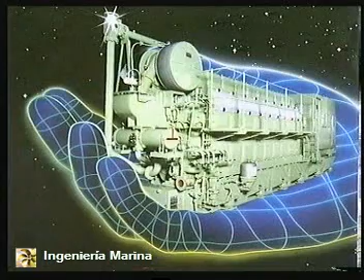This video shows how to overhaul the cylinder head, piston and cylinder liner. With regard to the dismounting and mounting of the components, please refer to the relevant instruction book or to the cylinder head, piston and cylinder liner exchange video.

This film shows how to use the tools which are available for the L28/32H type of engine.

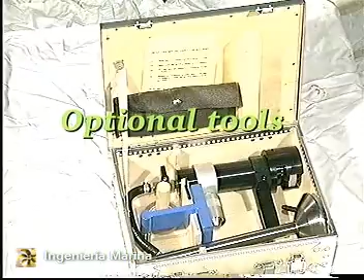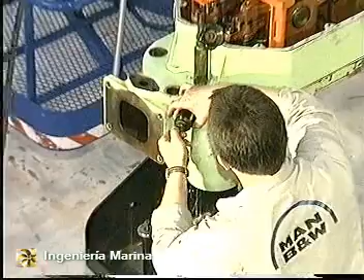Remove the scavenge air sleeve and the safety valve. For instructions regarding the overhauling of the safety valve, please see work card 605/01.25. The procedure for overhauling the indicator valve can be seen on work card 605/01.26.

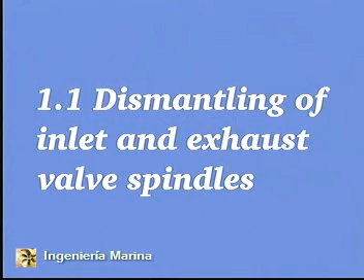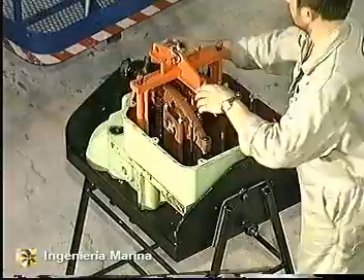Land the cylinder head on the work table. Make sure that the valve spindle supports have been mounted on the underside of the table. Remove the cylinder head lifting tool. Screw the cylinder head firmly to the work table.

Remove and discard the gasket. Remove the valve bridges and mount the tool for compressing the valve springs above either the two inlet valves or the two exhaust valves.

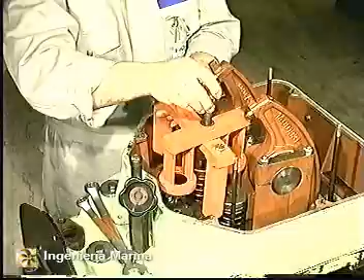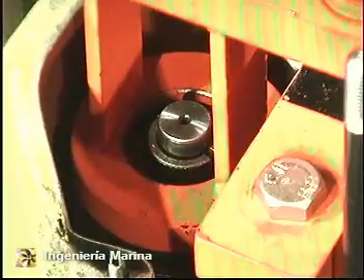Tighten the nut to compress the springs and then remove the cone rings. Loosen the nut and remove the compressing tool. Remove the valve rotators and the springs.

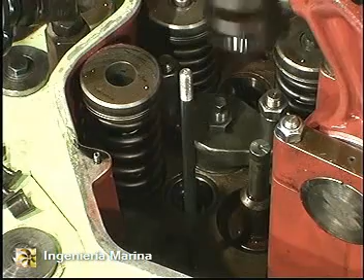For instructions regarding the inspection and overhaul of the valve rotators, see work card 605/01.15. Remove the cone rings, valve rotators and springs from the other set of valve spindles in the same way.

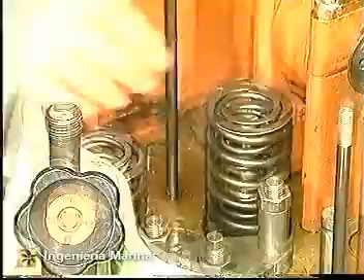Regarding the overhauling of the fuel valve, see work card 614/01.10.

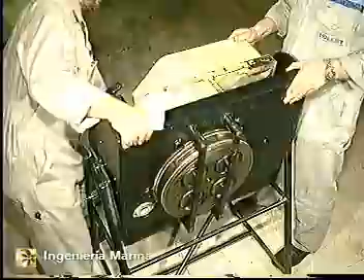Turn the cylinder head upside down and remove the valve spindle supports. To ensure that they can be rematched correctly, provide the spindles and cylinder head with numbers.

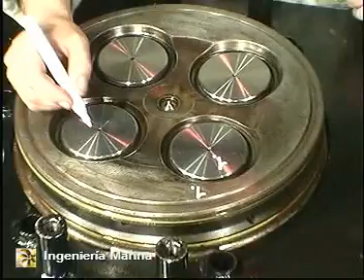Remove the valve spindles.

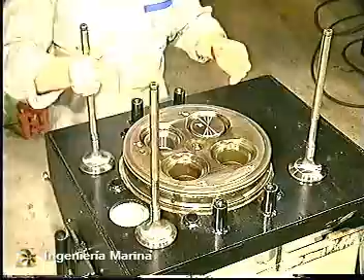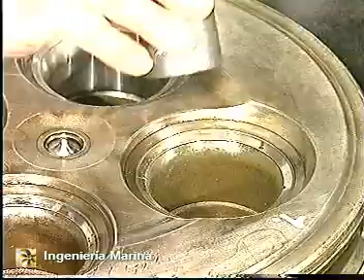Clean and check the condition of the valve seats and valve spindles. If the seats and spindles are badly burnt, recondition them. See work card 605/01.10.

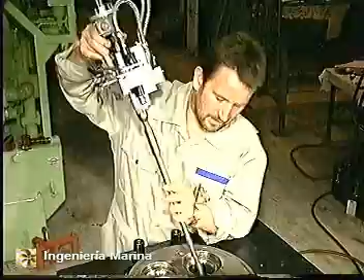Clean the valve guides with the special tool delivered with the grinding machine. Mount the grinding machine and grind the valve seats following the instructions of the grinding machine supplier.

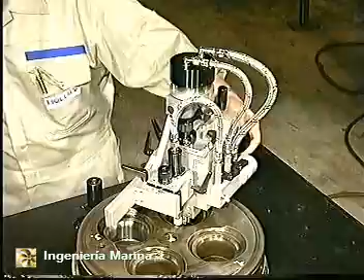Grind the valve spindles in a turning lathe following the instructions of the grinding machine supplier.

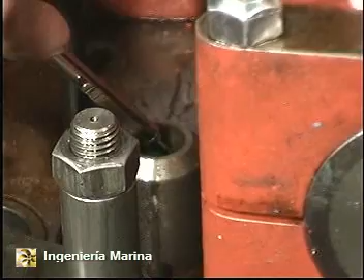Remove and discard the O-rings from the valve guides. To ensure the correct functioning of the valve guides, make sure that the diameters do not exceed the maximum limit.

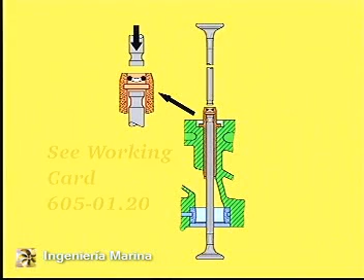Insert a valve spindle to facilitate the mounting of new O-rings. Insert new O-rings using another spindle to press the O-rings completely into the groove.

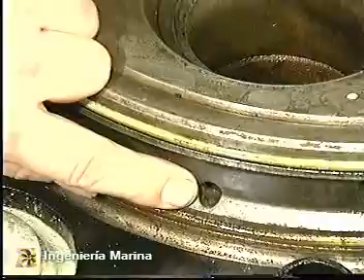Check the cooling water inlet bores and remove any deposits. Turn the cylinder head around and check the cooling water outlet.

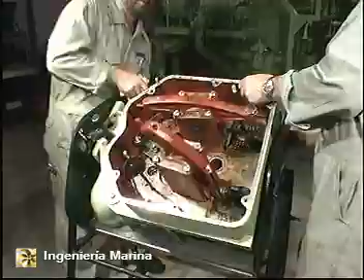Pour water into the cooling water outlet and ensure that water flows from all the inlet bores in the bottom of the cylinder head. If necessary, clean and flush the bores.

Mount the inlet and exhaust valve spindles in the reverse order to the dismounting.

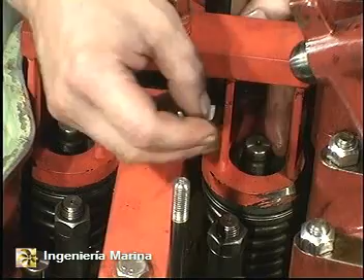Make sure that height H2 does not exceed the maximum limit. Remove the valve spindle supports.

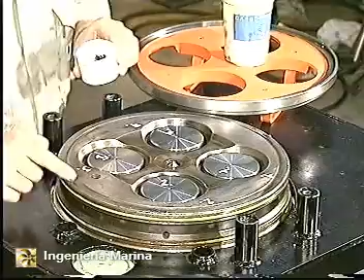Apply grinding paste to the sealing surface of the cylinder head. Move the grinding tool back and forth, lifting it from time to time so that the grinding compound is evenly distributed.

After grinding, carefully clean the cylinder head. Measure and record distance Z so that it can be used for reference purposes when remounting the cylinder head.

Mount the valve bridges and remove the securing screws.

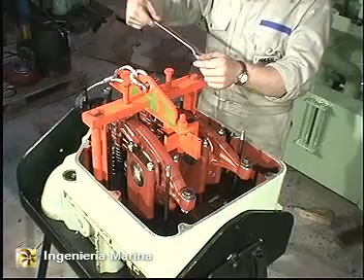Mount the cylinder head lifting tool and lift the cylinder head.

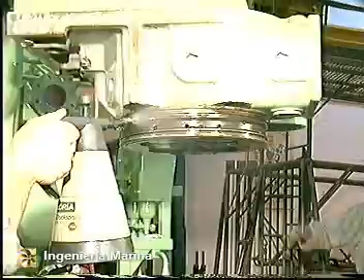Remove and discard the O-rings. Clean the O-ring grooves using emery cloth to remove any deposits.

Make sure that the cylinder head sealing surfaces are clean and undamaged. Lubricate new O-rings with oil and mount them in the grooves.

Lubricate the safety valve with Molykote or a similar product and screw it into the cylinder head.

Remove and discard the piston rings and the scraper ring.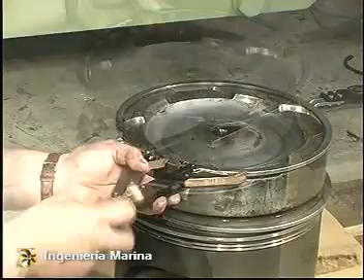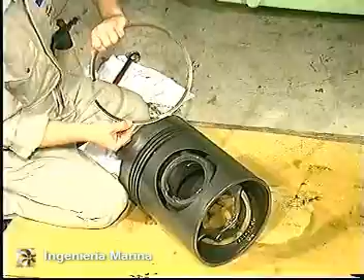Clean any deposits off the piston. It is recommended that a piece of old piston ring be used to clean the piston ring grooves.

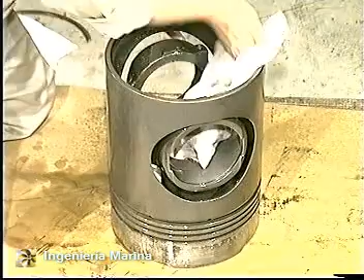Clean off any deposits from the inside of the piston. Check the piston ring grooves and scraper ring groove for wear.

The piston must be scrapped if the wear limit line on the testing mandrel is exceeded.

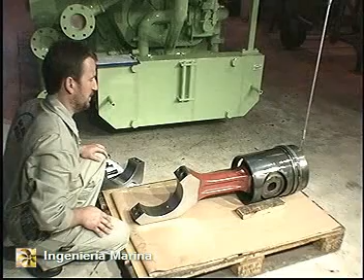Clean all machined surfaces of the connecting rod and bearing cap. Clean the serrated joint faces and threaded holes with a volatile solvent and then blow dry with compressed air.

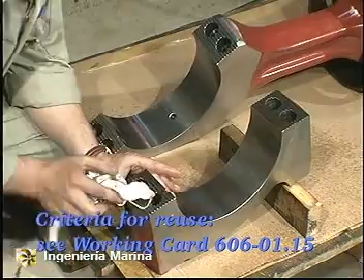Check the serrated joint faces for wear marks, pitting, cracks, etc. Refer to work card 606/01.15 for possible rectification and reuse criteria.

Enter observations in the connecting rod inspection report.

Clean the threads of the screws or the studs and check them for seizures. Lubricate the threads with Molykote or a similar product and check that the screws or the studs can be screwed fully home by hand. Take great care that the lubricant does not come into contact with the joint faces of the bearing. Also check for seizures or pitting on the contact surface of the screw heads.

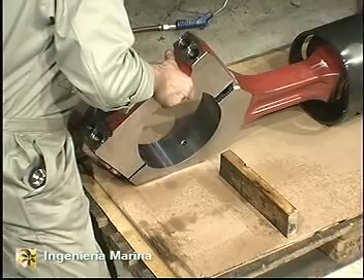Assemble the bearing without bearing shells. Make sure that the identification numbers on the connecting rod and those on the bearing cap are the same. Hand tighten the bearing assembly.

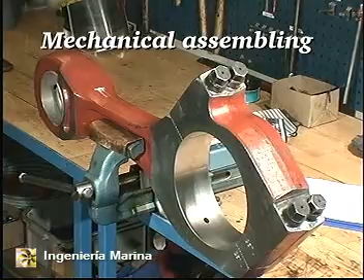The big end bearing must be tightened according to the prescribed tightening procedure before measuring the diameters. Adjust the torque spanner to 400 Newton meters. Using an initial torque of 400 Newton meters, tighten the screws in the tightening sequence shown.

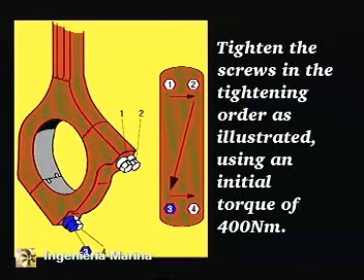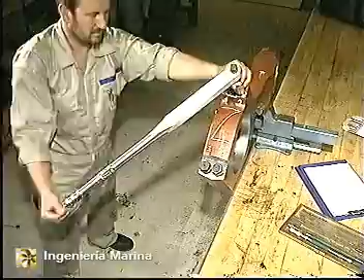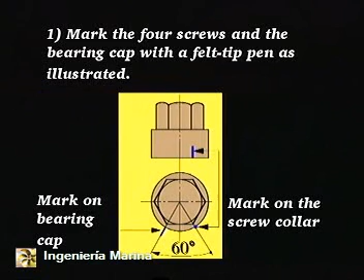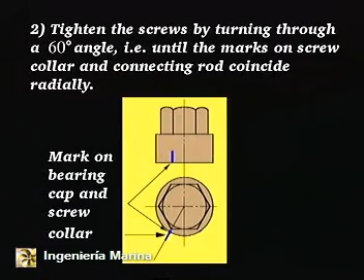Retighten the screws in the same tightening sequence, still using a torque of 400 Newton meters. Make marks on the 4 screws and the connecting rod with a felt-tipped pen. Tighten the screws in the same tightening sequence through a 60-degree angle until the marks on the screws and those on the connecting rod coincide in the radial direction.

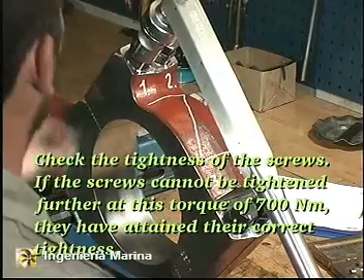Adjust the torque spanner to 700 Newton meters. Check the tightness of the screws. If the screws cannot be tightened further at this torque of 700 Newton meters, they have attained the correct tightness.

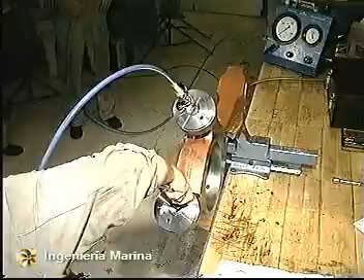The big end bearing must be tightened according to the prescribed tightening procedure before measuring the diameters. Clean all joint faces and mount the hydraulic tools. Make sure that all the parts engage correctly. Connect the hydraulic tools to the high pressure pump. Vent the system if necessary and increase the oil pressure to the prescribed value.

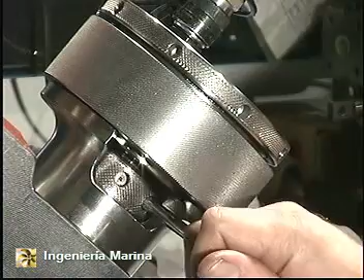Tighten the nuts with a tommy bar. Relieve the system of pressure and remove the hydraulic tools.

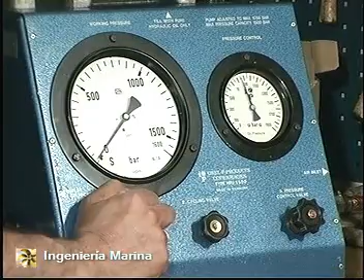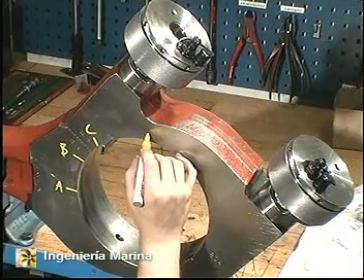Mark the 5 positions, A to E, at which the diameters of the bearing bore are to be measured. Measure the diameters in the middle of the bore and note down the result in the connecting rod inspection report. The maximum ovalness is defined as being the difference between the largest and smallest diameter measurement. Please refer to page 600.35 for maximum allowable ovalness values.

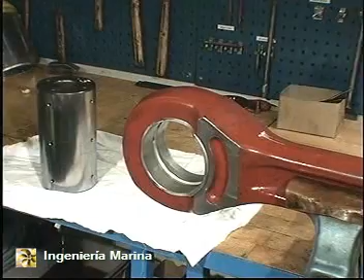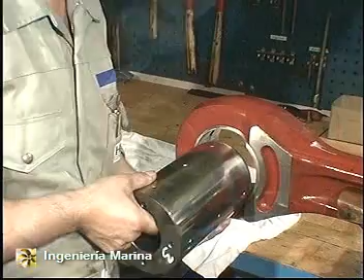Clean and inspect the surfaces of the piston pin and the connecting rod bushing. Insert the piston pin and measure the clearance between piston pin and connecting rod bushing. The maximum allowable clearance values are given in page 600.35.

Loosen the big end bearing assembly and then hand tighten it.

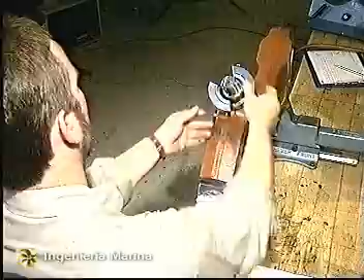Inspect the big end bearing shells through the magnifying tool. For help in evaluating bearing conditions, please refer to work card 606/01.16.

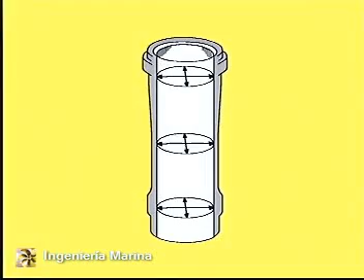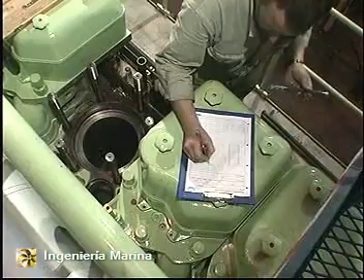Mark the positions in the longitudinal as well as in the transverse directions at which the diameters of the cylinder liner are to be measured. Make sure that the measuring tool has approximately the same temperature as the cylinder liner. Measure the diameters in the longitudinal as well as in the transverse directions and enter the results in the measurement of cylinder liner report. Please refer to page 600.35 for information regarding permissible cylinder liner wear values.

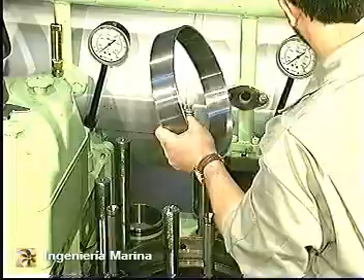If the liner is designed to hold a flame ring, clean and reinstall the used flame ring before honing the liner. Mount the tool for holding down the cylinder liner and remove any deposits or wear ridges from the upper part of the liner. Fit the drain funnel to the lower end of the liner to prevent contamination of the crankcase during honing.

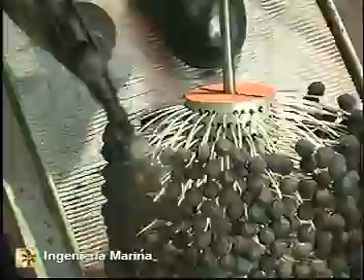Lubricate the honing tool and the liner with honing oil or cutting oil. Adjust the speed of rotation to 80 to 160 RPM. Use a vertical speed of about 1 meter per second to achieve the required angle between the honing grooves.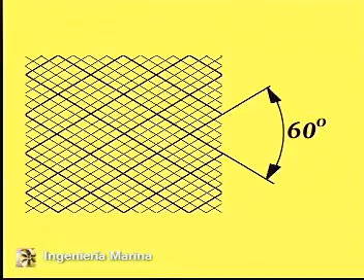During honing, lubricate freely with honing oil or cutting oil. Continue the honing until the cylinder wall is covered by honing grooves and has a slightly matte appearance without sign of glaze.

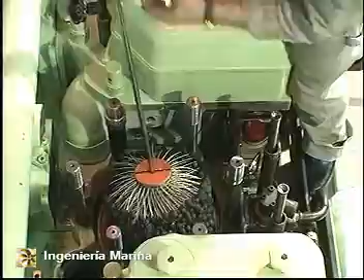Clean the cylinder liner carefully and remove the tool for holding down the cylinder liner. If the liner is designed to hold a flame ring, clean and install a new flame ring.

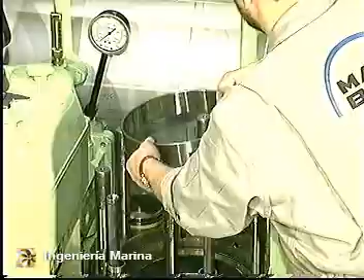Remove and discard the old sealing ring at the top of the cylinder liner. Apply grinding paste to the grinding tool. Move the grinding tool back and forth, lifting it from time to time to allow the even distribution of the grinding compound.

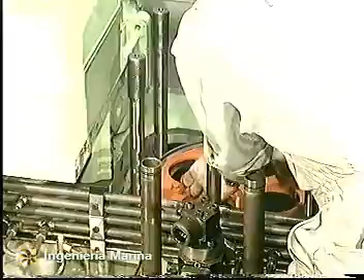After grinding, clean the cylinder liner carefully and mount a new sealing ring. Remove the drain funnel.

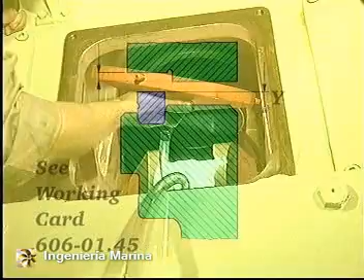Measure and record distance Y. Please refer to measurement Z, which was recorded during the overhaul of the cylinder head. To ensure that the sealing between the cylinder head and the liner is correct, Y minus Z must be more than 0.5 mm.